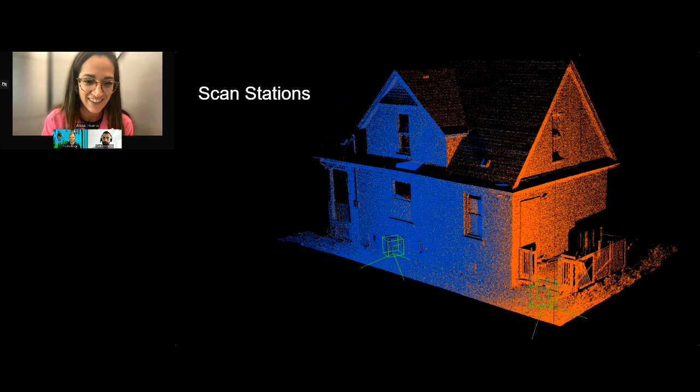This goes back to good planning as well, like Ted talked about in the photogrammetry section. Before you go on site, you really need to plan this in advance. We always say, what are you doing with the scan? So you have to know what you're doing with it, and you'll have to make sure you have a clear line of sight to everything you're trying to scan.

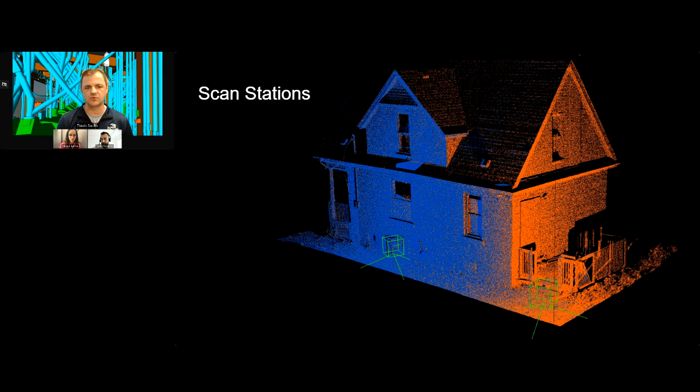Because you can only capture what you can see, you want to make sure you're able to see what you need to. Then with the registration, each setup position will have a mass of 3D points that form individual point clouds, and you'll want to put them together. There are different methods you can use for that.

Typically you'll want some sort of control network that you capture with a total station, or even just setting up targets. But also, these softwares now use lots of algorithms, and they'll use walls and fixed objects to calculate that registration throughout the whole scan. So instead of just using single targets where you might get 100 points, with cloud registration it'll use all those millions of points and try to match them to the other millions of points, so it's a much tighter registration.

With that example we just saw, that's two different scan locations. When you take a very thin slice, you can see how those registrations align to each other.

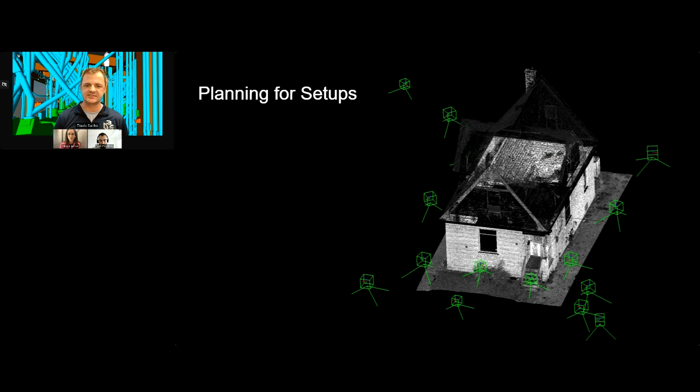Again, the first question we always ask is, what do you want from the scan? What are you trying to capture? That will determine the outcome, because sometimes you don't want to overscan, since then you get too much data, because we're capturing literally millions and millions of points a second.

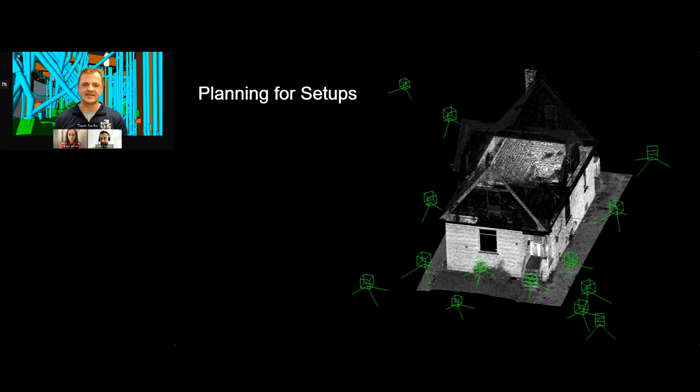So those data sets can get very heavy quickly. We want to make sure we do proper site planning, and make sure we capture what we need, a little bit more than what we need, but not too much more. You always want to make sure you capture enough. It's always better to need it and not have it, than to have it and not need it, because then you'd have to return to site.

These comparisons are all from terrestrial laser scans, so static scans. I'm seeing some comments about SLAM-based scanners, mobile scanners. Anytime the scanner is moving, there's more to account for, so the true reference comparison here is always going to be terrestrial laser scanning, static scanning.

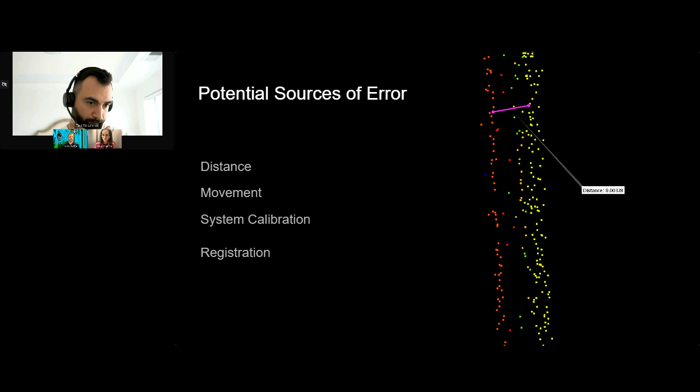Some sources of error you can get are distance, as I talked about with the phase shift scanners. As you move further away, you start getting more noise, range noise, and things like that. If your scanner moves during the scan, some of the higher end scanners like the Leica P series have dual axis compensation, so they can compensate for that. But the mid and lower range terrestrial scanners don't have that compensation, so you'll get errors in there.

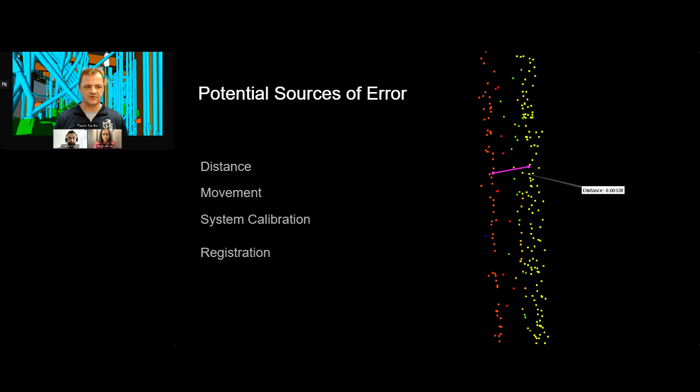If there's anything with your system calibrations that's wrong or not up to date, it gives you false returns. With some of the mobile scanners, that data you can actually manipulate. With the terrestrial scanners, you can't manipulate the data - it's one-to-one, it is what it is. Some of those mobile scanners, you can really run into some big errors pretty quickly if you don't have a really tight control network.

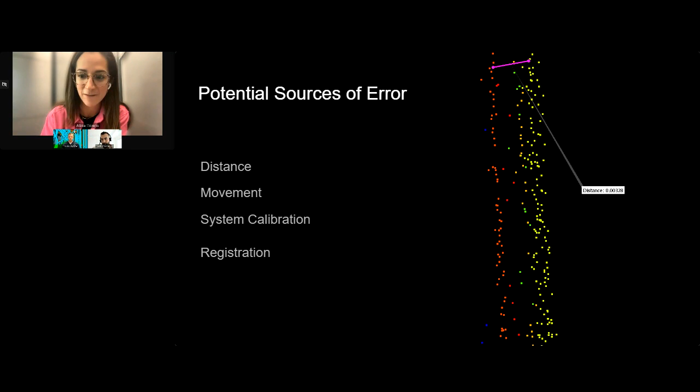So what you capture is what you get, basically, and there's very little room for improving or changing that data in post-processing. Yeah, exactly. So in those cases, you would get errors if you don't have a proper registration, and that's where you put the two together. That's one of the limitations for sure.

And then if you're doing a large complex site and you need to hold that accuracy, like a whole factory, it's much easier to capture that data with a terrestrial scanner. So it'd be good for that application.

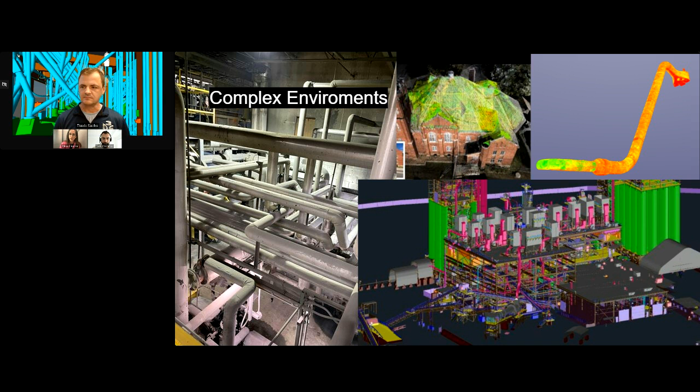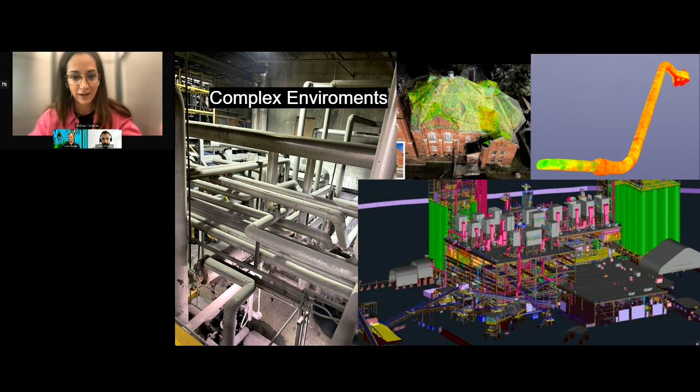Yeah, I think when I was at Bentley, there was a significant number of infrastructure owner operators that were looking into the hybrid approach, going from LiDAR laser scanning for very complex environments, and adding the photogrammetry layer on top of that to create a hybrid model that was ultimately the best possible digital twin they could work with. So yeah, this is a very good use case or example of that, I believe.

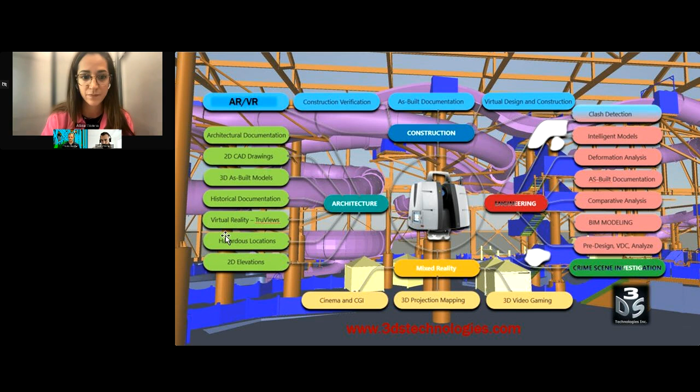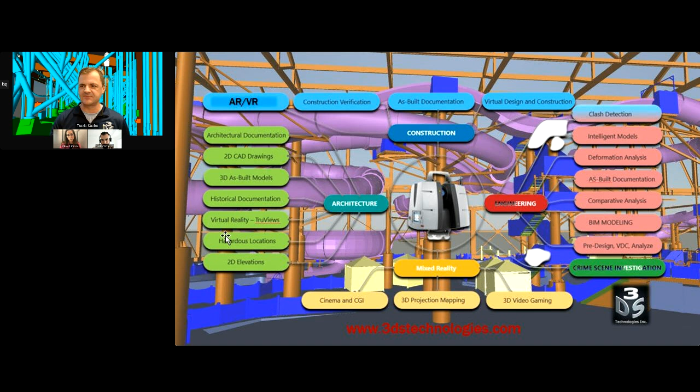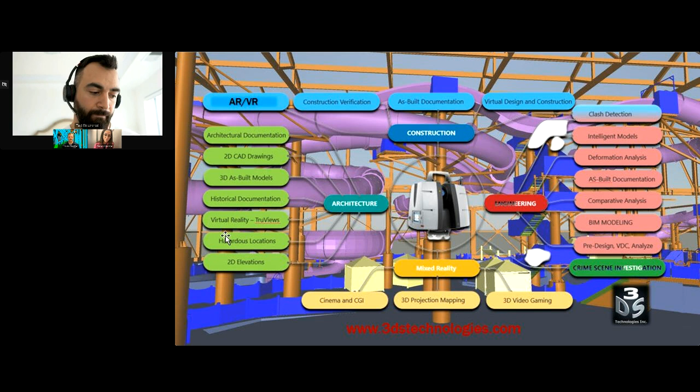Yeah, and as you can see, in terms of LiDAR, the applications are endless. You can use it for many different applications, and that list is growing because I think we're starting to see the benefits of certain applications and how much easier this makes it. Yeah, for sure.

Let's maybe touch on the cost here. Travis, what could you tell us about the cost of these type of projects? Yeah, so it ranges, right? You can get a low range terrestrial scanner in the tens of thousands of dollars, and then you can go all the way up to $250,000, and some of the mobile mappers are in the millions.

And the difference between those will be the range noise, angular accuracy, things like that, and the speed of the scanner, all kinds of things. And then with the scanner, you also have to take into consideration the annual calibration costs. And typically most scanners, you have to purchase a registration software. There are free registration softwares out there, but to get really good results, you'll want one of the proprietary softwares.

Yeah, and I think again, we go back to the project requirements and the customer needs, right? It depends on budget, that's a key one when we're talking about which technology we're going to be leveraging for specific projects. What's the budget, what are the final requirements in the deliverables, that will help you decide, do you really need laser scan? What are, and what's the budget?

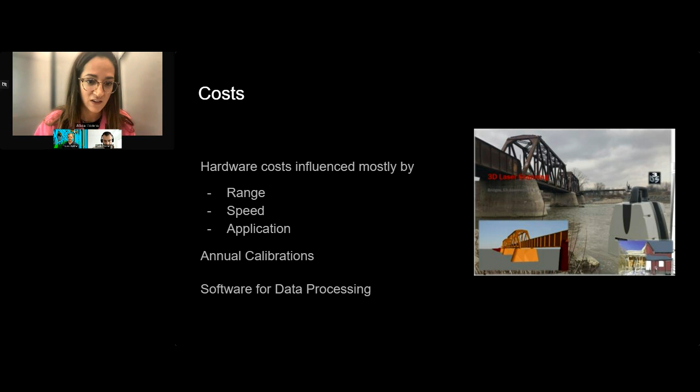So do you find that a lot? Well, yeah, and that's one of the things we help our customers with, because if you just need a floor plan, then you don't need a $120,000 P-series scanner, right? A Matterport might be fine. So it all depends on the application. We always ask, what are you trying to do? And we'll try and help our customers make the best decision. And in a lot of cases, photogrammetry is great. It's a great solution.

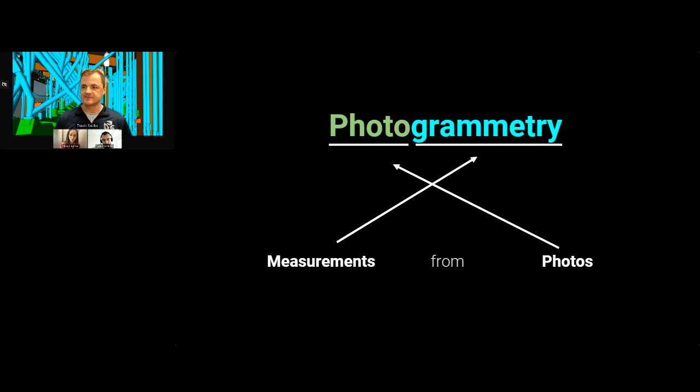Yeah, absolutely. Let's move on to photogrammetry, Ted. Let's start with the basics. Yeah, I think most of the audience probably has a fairly good understanding of photogrammetry just because it is so accessible and people are starting to really try it themselves. And that's really the best way to understand how it works.

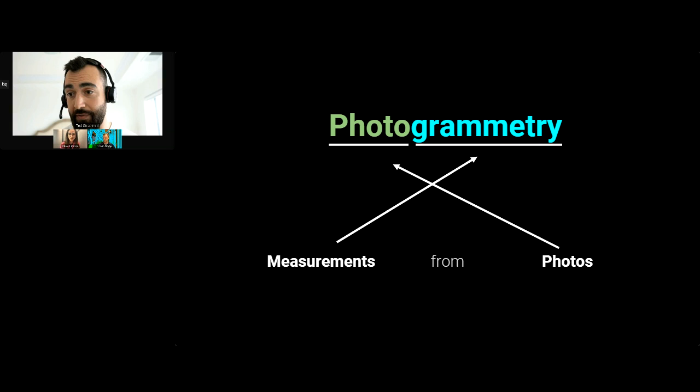But fundamentally, it's measurements from photos. So in order to make those measurements, we need photos, and those photos need to be overlapping and captured in a very consistent manner. Same distance from surface is very important. That kind of dictates the accuracy you can achieve. And if that's the same across the entire subject area, then you have a much higher chance of getting the accuracy you desire.

But any photo works. In this case, the data you're going to see, all of the imagery was collected with the Skydio S2 Plus, using the 3D scan software that is on the drone itself, which allows it to take over and do all of the data collection autonomously.

I just give it a section, a volume, and it just goes and collects. Both the laser scan and the photogrammetry were done on the same day for this asset.

So after you have those photos, the photogrammetry software goes and matches them. Essentially, the unknown is where was the camera when the photo was taken? Where was the drone, and how was the camera pointing when the photo was taken?

So that's done by creating tie points first. Those are sort of like fingerprints, like little signatures within each image, and then matching those tie points. You can see here how those matches correlate to each other. These are 3 images that are captured sequentially.

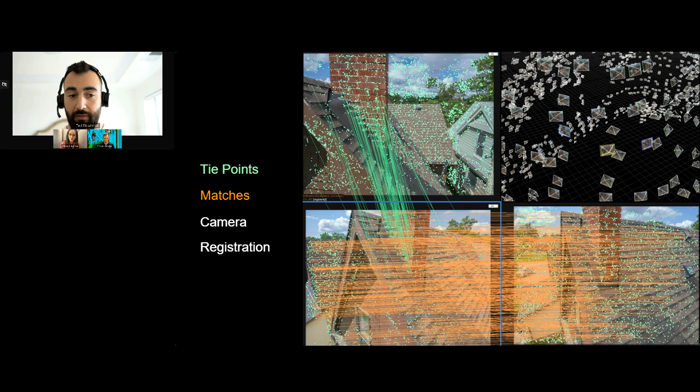After that's done, we can register those cameras. It's very similar to how those laser scan stations are registered together, except we're registering images. But how do we get 3D from 2D images?

Through that process, the densification of those points, and more triangulation, we can extract depth maps from these images. A depth map is still a 2D image file, but it has another dimension there that's usually shown as this grayscale color, and that is the distance away from that camera.

And similar to the laser scan, I guess planning your flights is essential, right? Weather conditions, overlap, these kinds of elements are going to have an impact on your final deliverables, and the quality of your final deliverables.

Exactly, and laser scanning is an instrument that is very finely calibrated, very accurate from the factory, and it doesn't fluctuate very much. But cameras fluctuate a lot, and there's many models of cameras, many lenses. All of those factors come into play. So it's really about controlling those unknowns as much as possible, so having something that takes some of that work or effort away from the user really helps.

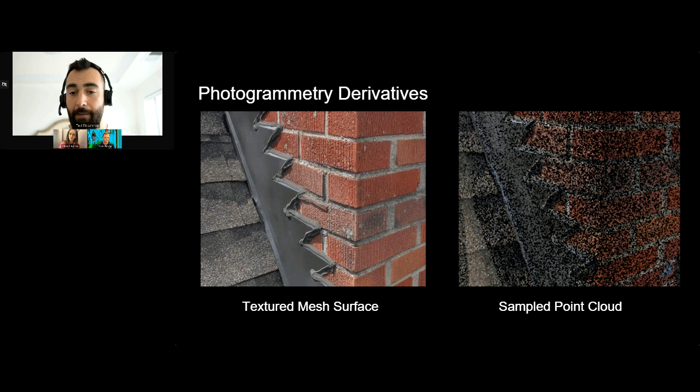And from there you get to what you see here. The two main derivatives we see with photogrammetry are textured meshes, which give you this photorealistic surface, and then from that surface you can extract or sample points. Some photogrammetry engines do this a little differently—they skip the depth map and just make more tie points.

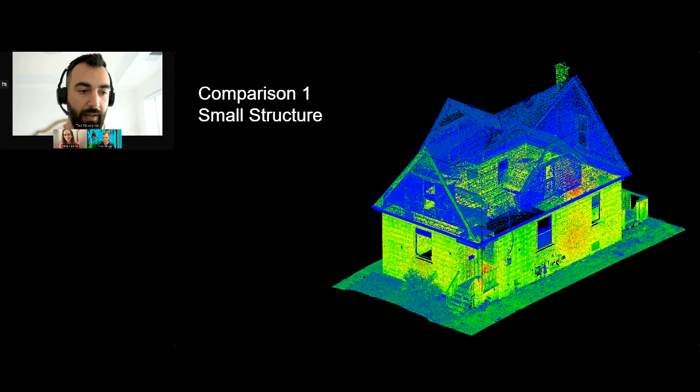In these examples that I'm going to show, I use Bentley Context Capture, or iTwin as it's called now. And iTwin does that route where it goes depth map, mesh, and then subsamples the points from that mesh.

So yeah, let's dive into the comparison. Here's the area that we scanned. You're seeing the laser scan, and you're seeing the point cloud from the photogrammetry overlaid on it after I've registered those two things together.

So which one is which? Yeah, so the laser scan is the one that's brightly colored. That's showing you the intensity of each return. Laser scanning can't show you color, but it can show you how reflective the surface is that pulse of light or phase of light bounced off from, and that kind of replicates color quite well.

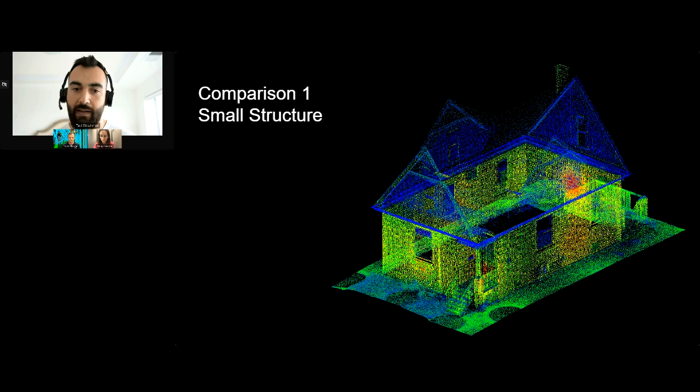So you can make out certain details. You can't really use it for inspection, like bridge inspections or structural inspections, but there is some detail there that allows you to conceptualize what you're looking at and see the difference in materials as well.

So for this specific—yep. No, sorry, I was going to say I expect that's already for certain projects an advantage of photogrammetry versus LiDAR.

You get, after the flight and the processing, already a representation of your physical asset, which you do as well with LiDAR, but you don't have that color in your final 3D model.

Yeah, with LiDAR you can add the photograph after, and then each point will have the RGB value. But it's an extra step after the data capture.

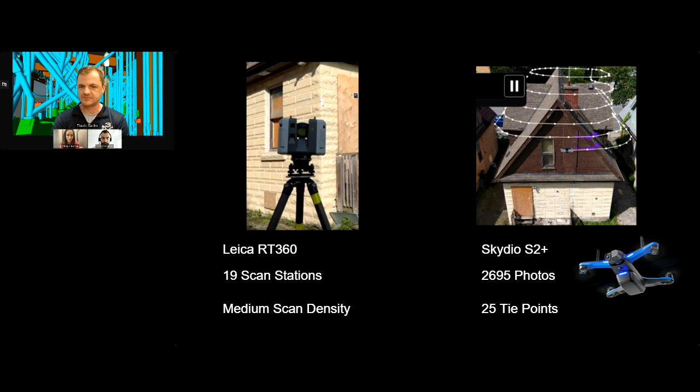Exactly. So the RTC that we used here has color cameras on it that it aligns for you, so you do get both. The main difference though is that camera on the laser scanner isn't really meant for inspection. It's fairly low resolution, and it's really just there to help you colorize the point cloud, give it a more natural look, and also help with registration, which is what you'll notice.

There's some targets around this building that I set up, and using that camera built into the scanner was how these two things were merged in the derivative that I was aiming for here.

Do you have a sense of the time spent on these two methods, with LiDAR versus the Skydio? How long did each take?

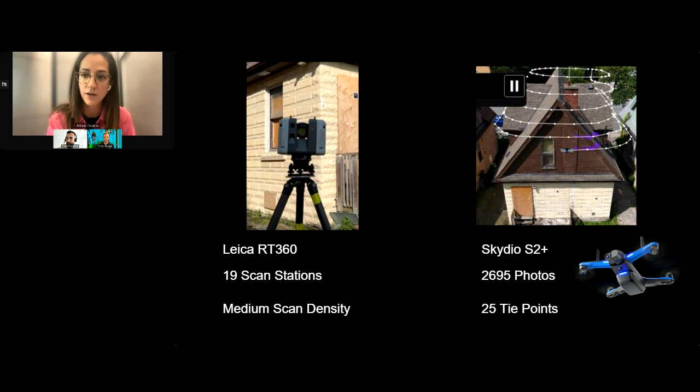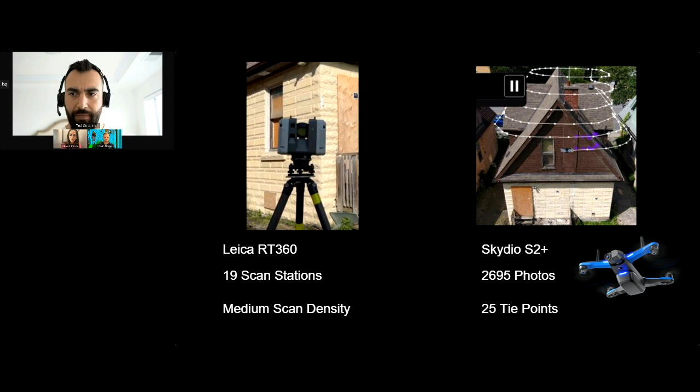The laser scanning moved along quite quickly, less than an hour. Laser scanning for small sites like this moves very fast. The photogrammetry was about 2 hours, so not significantly more. But again, there isn't much area here, it's just a lot of dense data collected in one spot.

So let's take a look at how we're going to compare these. Basically, we're going to use the terrestrial laser scan point cloud as the reference, the ground truth. We'll assume that's the most accurate representation of that asset we can get.

The first version is unconstrained, meaning no controls. Really the only thing that was there is what the software was able to find in the images and match, along with those stickers that I placed around the surface, which help align everything. This asset didn't really need those stickers, but I put them in because it helps bring the laser scan and photogrammetry data together in post-processing.

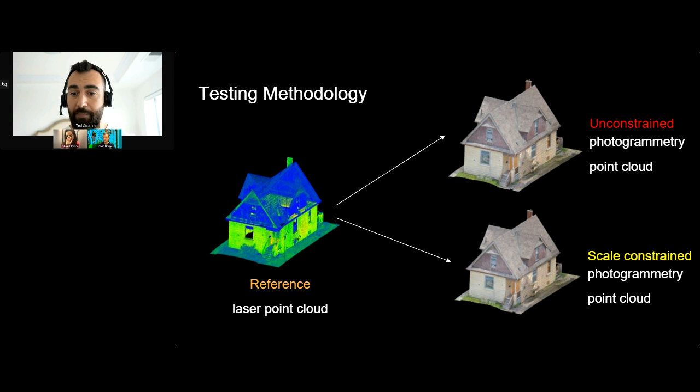The other version of the point cloud we'll compare to the laser scan is a scale-constrained point cloud. Same data, except now we're giving it one reference of scale, and you'll see why that's important and what difference it makes.

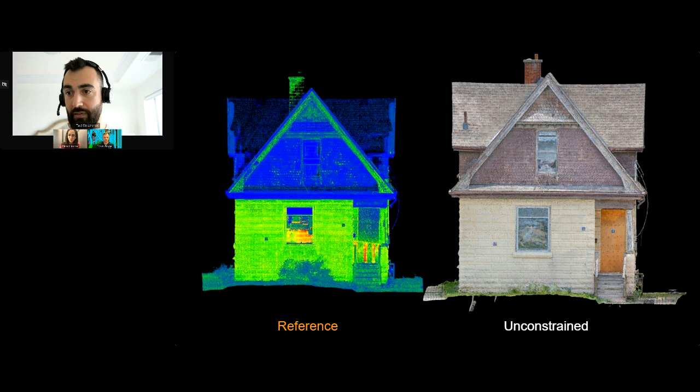Here's the basically raw, unscaled photogrammetry point cloud beside the LiDAR point cloud. You can see scale has obvious errors, right? The house appears to be much bigger than what the terrestrial laser scan dimensions show us here.

Let me clarify, since I've seen a couple of comments. The one on the right is the one coming from photogrammetry, and that's unconstrained right now, but we'll see another example where we've introduced a scale constraint. The one on the left is the one captured with laser scan, and you could have added color to that one as well.

There's an option to have it colored. And then there's also a way you could basically merge these two and create what Bentley Systems calls a hybrid model, using the laser scan data and the photogrammetry together to get the best possible 3D model. I have a post on LinkedIn that shows the final derivative of that.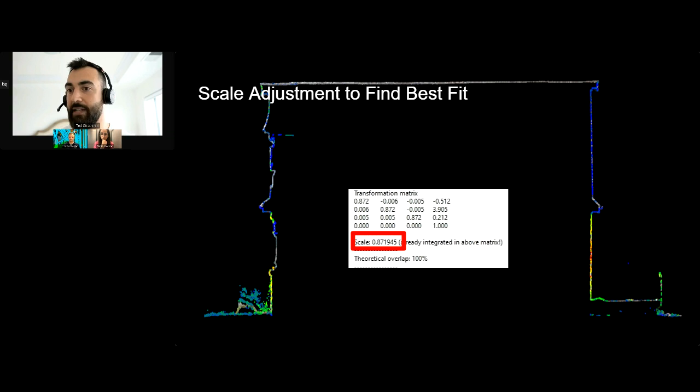To look at the factor of that scaling in this example, I did some very basic point-to-point matching, and it turns out the scale factor of photogrammetry to match the LiDAR point cloud is about 0.87. So you can think of it as the photogrammetry being 13% scaled up from what it should have been.

Which isn't bad for certain use cases. That would be good enough for what use cases, Ted? Exactly, for inspection that could be fine depending on what you're looking for. If you're looking for general inspection information, like where the cracks are, where the damage is, an estimate of how much area is damaged, 13% isn't going to make or break that inspection in a lot of cases.

In other cases, it is more critical. So doing something like this is probably what you should attempt first, which is giving the photogrammetry software a reference of what two distances within the scan are.

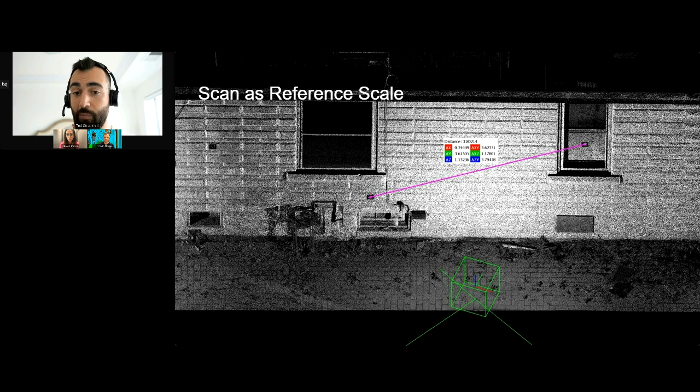So to do that in this test, I got that reference from the laser scan. I had two targets and measured the distance between them. You can see here it's roughly 3.8 meters. I take this measurement, find those exact two spots in the photos, and tell it this is 3.8 meters. So from here on, use this for the rest of the reconstruction. That should bring everything back down to scale where we expect it to be.

And this is available in most photogrammetry softwares. All of them. Scaling is such a basic thing. Again, it's just a rigid global scale. It's not like we're taking one side of the house and making it slightly larger than the rest. It's just one rigid adjustment.

To do that, it helps to have a point of reference, a target, something to pick and say this is the center of the first point, this is the center of the second point. In this case, I used AprilTags, which are very useful for many other things. But you can see here that with the photos, you have a lot more precision in picking that point that's right in the middle, because from just a point cloud, you're left with the points that you see. So the intensity and color added to laser scanning helps find where that target is.

But there's some measurement error there. Where are you going to click? Where exactly is the center? You can see in the photo it's very, very high resolution, so you can see that center clearly and click within a few pixels of it. It definitely provides more context as well.

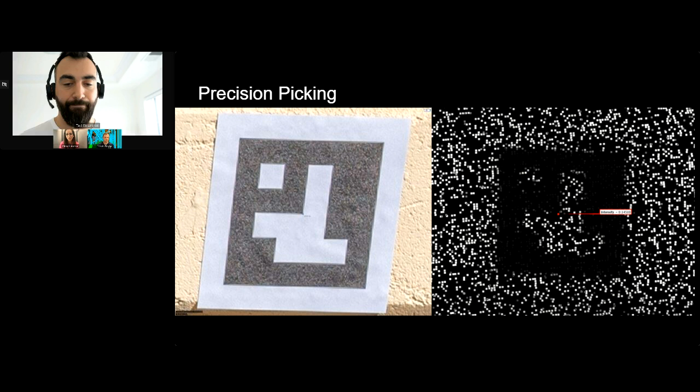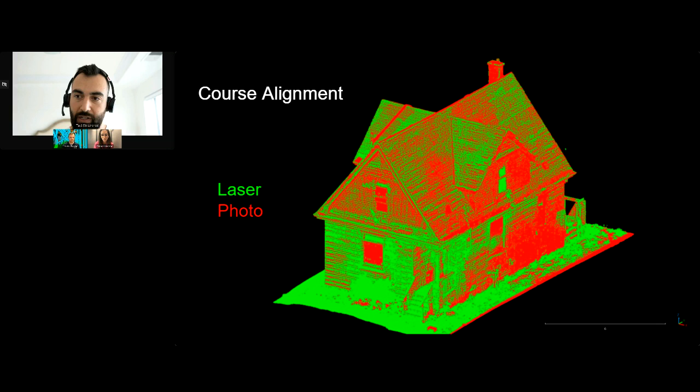So now taking those two scaled versions, the laser as the reference and the photogrammetry using that scale constraint, and doing a quick coarse alignment on those two point clouds, you can kind of see how they match. This is just a very coarse alignment. The laser is green, and the photogrammetry point cloud is red. So in some places they're overlapping, some places one is under the other, etc. We can do a finer alignment next, and then compare exactly how these point clouds fit within each other.

To do that fine alignment, this is stuff you can do yourself, and if you have questions on how I did this, feel free to reach out to me directly. I'm more than happy to show you how. But in a nutshell, we bring in the photogrammetry point cloud, bring in the laser point cloud, use that as a reference, and then disable scale adjustment. So in this alignment process, it's not allowed to adjust the scale of the photogrammetry point cloud, because I'm saying I've already handled that scaling in the photogrammetry software. So it's a very apples to apples comparison, straight out of the post-processing.

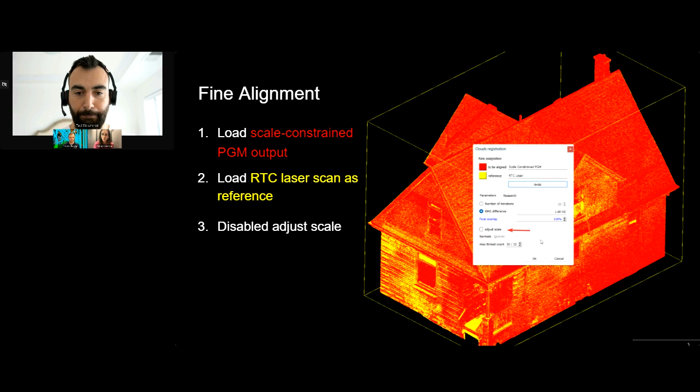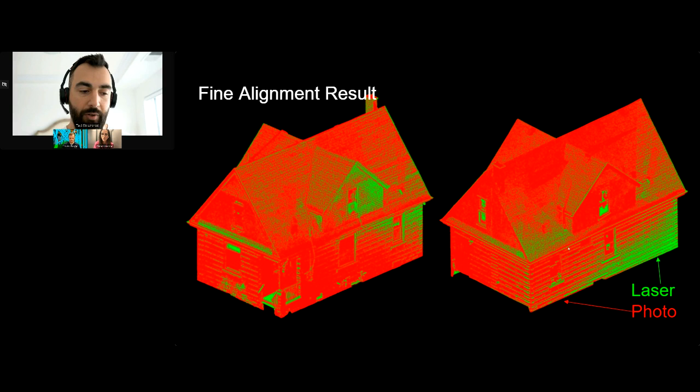Here's the result of what it looks like after that final fine alignment is done. The point clouds are transformed, moved a little bit to fit as best as possible. You can see again that area where one is slightly out in front of the other. There's a little bit of deviation, some distance between these two points in some areas. Some areas they overlap perfectly, and other areas the photogrammetry point cloud is in front of it.

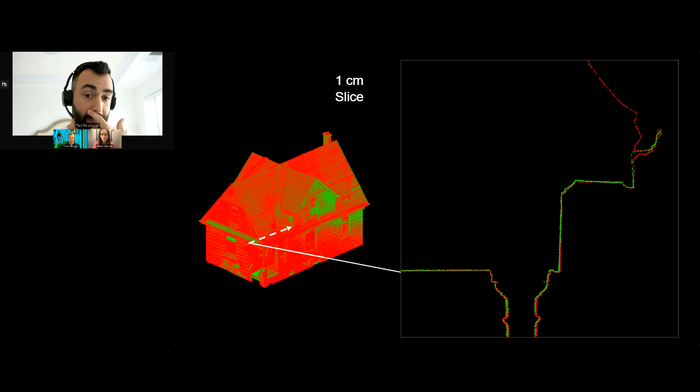Let's take a finer look at this. I'm taking a cross section, a 1 centimeter wide profile, running down the side of the house at the corner, and you can see the red is photogrammetry, the green is laser. These are very close, but there are deviations. There are areas where the photogrammetry gets it wrong, and most of the time that's because the material we were modeling might have been metallic, might have had some reflection. Reflections, anything with that type of surface, is very challenging for photogrammetry because it just can't match points between multiple images.

But on the other hand, the laser scan also has some areas where it just can't see. It's all line of sight. So having the two together allows you to completely cover all the surfaces and all the dimensions. And all of these measurements are metric, by the way, so we're looking at millimeter differences between the two.

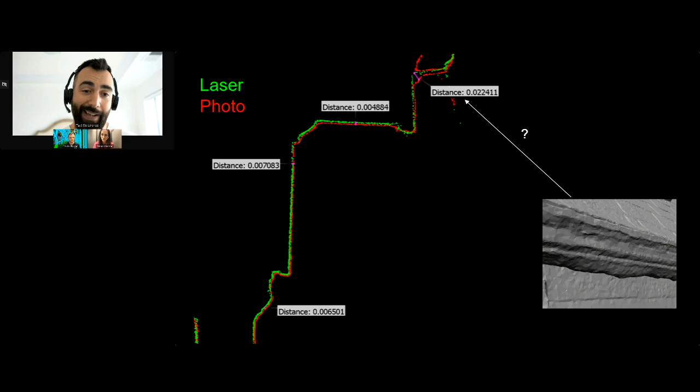And the worst case is at the top there, 2 centimeters. And that's because of that smoothing that photogrammetry can create. You can see what that smoothing looks like in the model. It's this sort of melted eave trough, right? That's not really what it looks like. The LiDAR has no problem with that, but the photogrammetry will always have problems with that.

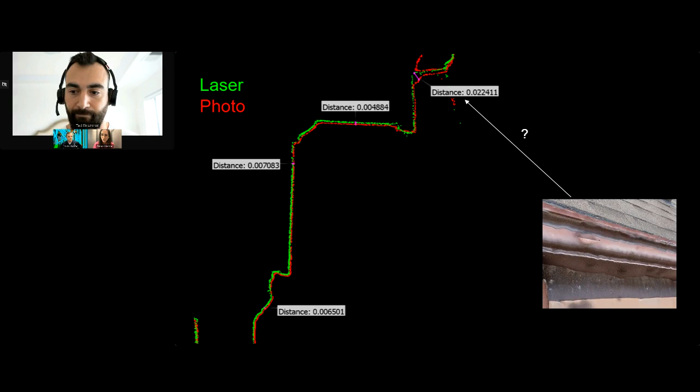Can you recall what's the GSD for the photogrammetry model? I don't recall, I think it was in the millimeter range. As you saw, this area was pretty tight, so we had to fly really close to it. So GSD, the spatial resolution of the images, was quite high due to the fact that we were so close to it.

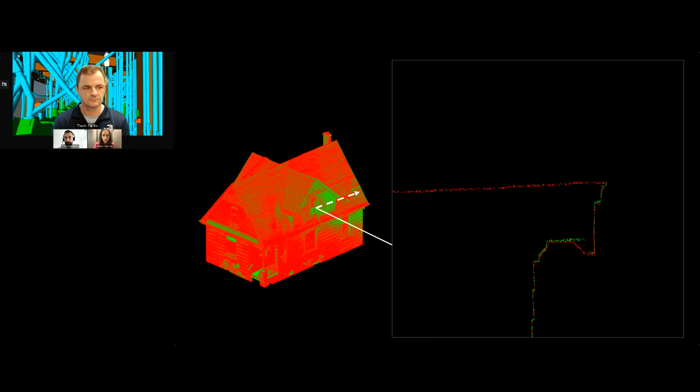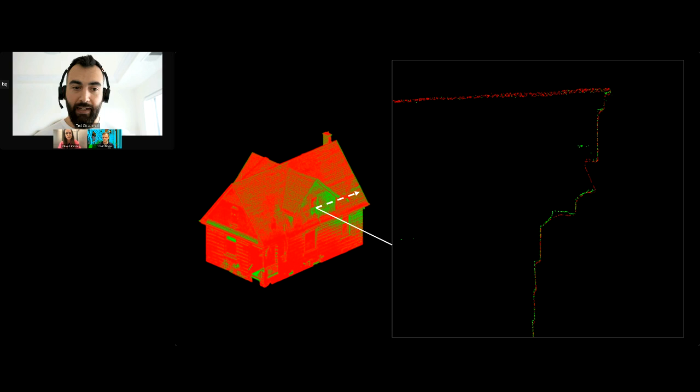And I think you mentioned already, but you use Context Capture for this specific project, but we use Skydio. Skydio data is compatible with most photogrammetry platforms. But I think you're quite familiar with both Context Capture and Reality Capture. What are your go-to tools when it comes to photogrammetry? Well, if I want to take both and create that hybrid scan, I prefer Reality Capture because it supports structured point clouds in a way that allows me to very fine tune that alignment between the photos and the laser scan. But generally, it's what you're comfortable with and what you're doing.

So with photogrammetry you have lots of options. With laser scanning you use the software that scanner supports essentially. At the end of the day, again, it's always what are you after, what's the deliverable. Context Capture is what I'm showing for the photogrammetry point cloud here, and it has not been merged with LiDAR, or else it would look perfect - they would be a 1-to-1 match here. But Reality Capture is great to combine them as well, and there's some other software there too.

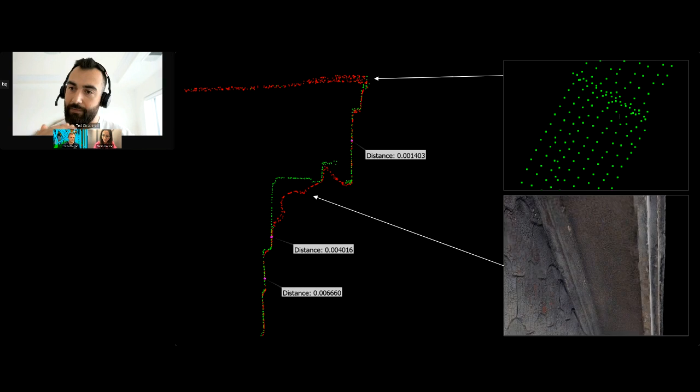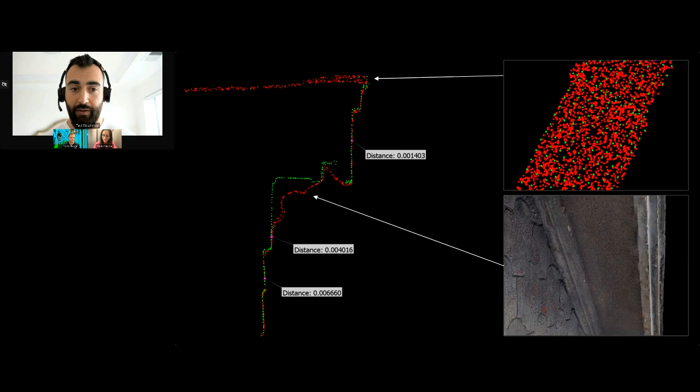So here's another example. Again, those distances very close, sub-centimeter - 6 millimeters at the bottom, 4 millimeters. And then you can see another one of those cases where the red points, the photogrammetry points, are kind of melted. It's smoothed across, and it's not really showing the true geometry of that portion of the house. You can also see an area where the laser scan just didn't see anything - it was in a shadow, so there's no points from the laser scanner there, and that's pretty evident at the top, that's the roof. So the roof was on a pretty steep slope, and due to that high angle of attack for the laser, we're going to get less points that come back and are registered on the scanner itself, but still enough points in this case to make a surface out of it.

Now, just to show that I'm not cherry picking locations, let's take a look at a global comparison of the distance between these two point clouds. A wonderful software to do this in is called CloudCompare. It's completely open source, amazing software made specifically for this purpose. It's going to compare the photogrammetry point cloud to the reference laser scan point cloud, and it's not just going to compare to the nearest neighbor, because that distance may be incorrect, but it is going to use some local modeling to essentially create a surface from that laser scan and measure the absolute distance between the compared point and the laser scan surface.

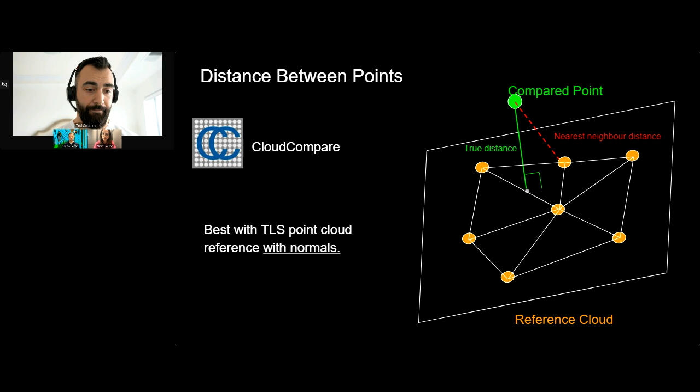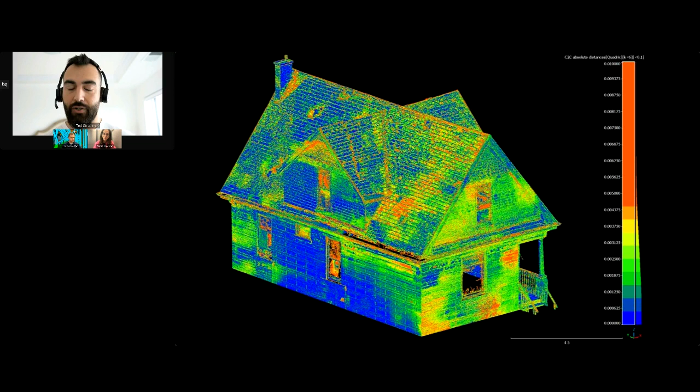So this is what it looks like in this color scale. You're seeing the photogrammetry point cloud, but the colors that each point has inherited show us the distance of that point to the laser scan. So anything in blue is basically zero - there's no delta between the photogrammetry point cloud and the laser point cloud, they're right on top of each other. Anything that's in red is 5 millimeters or above. There obviously is a lot of outliers here, things like glass and those surfaces that I showed you earlier - I've taken those out of account. I'm looking at anything within a centimeter of each other and how that relates globally to this scan. So you can see, very, very close.

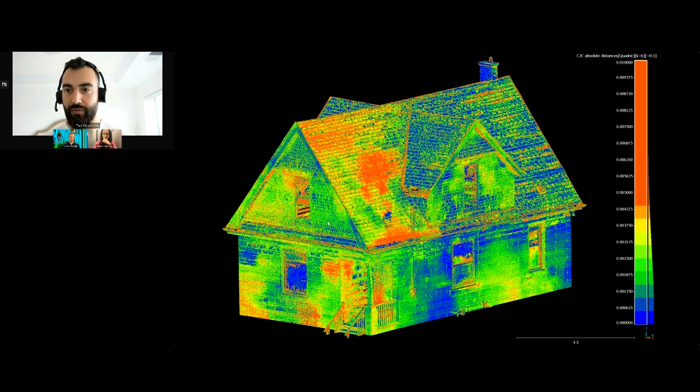There are some areas where we're seeing that centimeter distance between the two, and those areas are where you'd expect them to be. They're on that roof. Remember, there's less laser points to compare to there, so it's not directly indicative of systematic error or measurement error here, but the distribution is very nice.

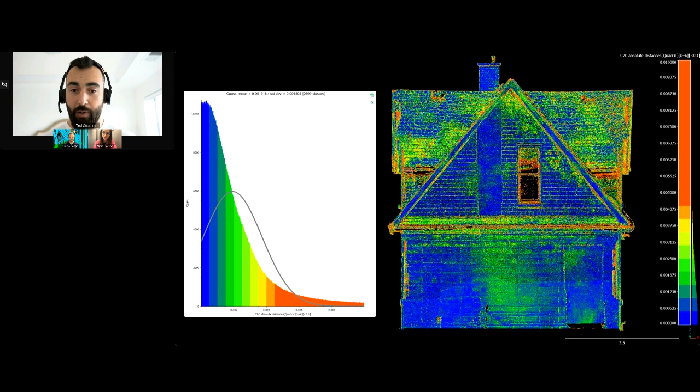It really does show that if this is done with even just one scale constraint and that's it, you can get really, really close. Is it perfect? Absolutely not. There's so many variables in photogrammetry and photos to get this right. But is it good enough for a lot of use cases? I'd say probably.

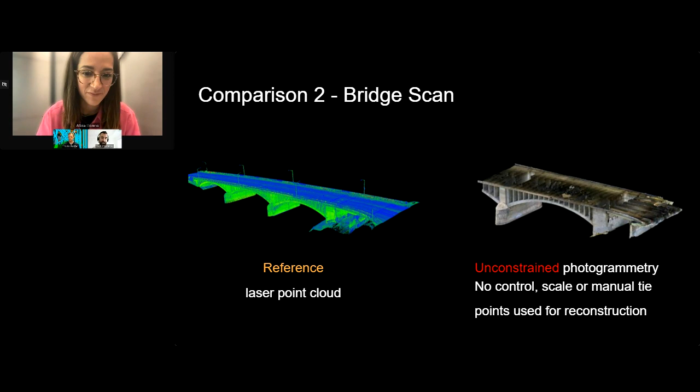And here's another example. Do you see consistency across different, like I know that this example was a small house, do you see consistency across different use cases? And I guess it's a good segue for the next comparison with the bridge scan. Yeah, that's the perfectly timed question, because consistency is key, right, when we're talking about measurements.

So with this example, you'll see that the results differ a little bit. To introduce these two data sets, the reference scan, again this massive scan of this bridge - in fact, Travis told me that this bridge wasn't even what they were there to scan. It just happened to be nearby, and there was enough data that I could use it for this. So that's an example of sometimes you get more data than what you need. We were focused on the area around the bridge, but we captured the bridge, and it just so happened that it worked out well for comparison.

Yeah, I think I saw you post this bridge on LinkedIn. I was like, oh my God, I have a scan of that bridge too. Can I have that point cloud? Because I really wanted to see this.

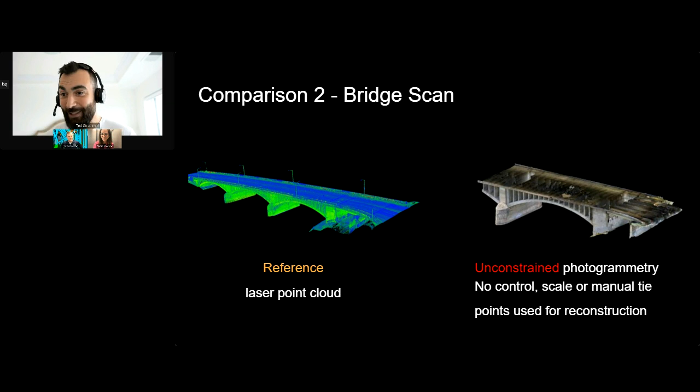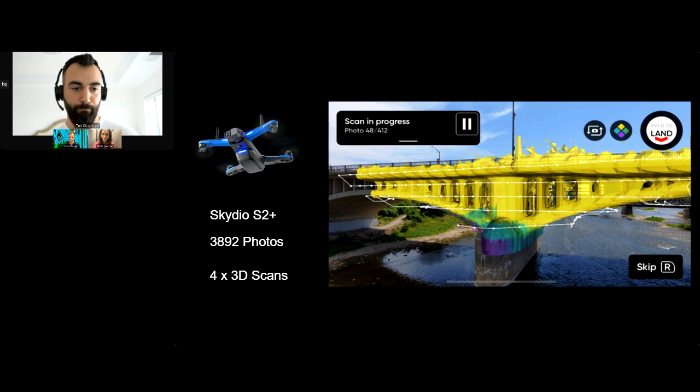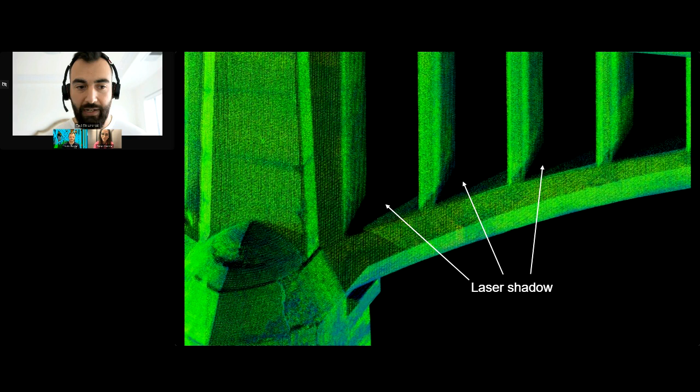To compare it, I'm taking a small section off the side elevation here of the bridge. There's some things that wouldn't be a good one-to-one representation of the two point clouds. For example, in the next slide you'll see, and you can see it here too, there's some shadows in the laser scan - that's line of sight. Travis had the scanner on the ground and the bridge is up there, it just can't see across there. If you really needed that, you would plan ahead and position the scanner in the appropriate location, but sometimes that might not be possible.

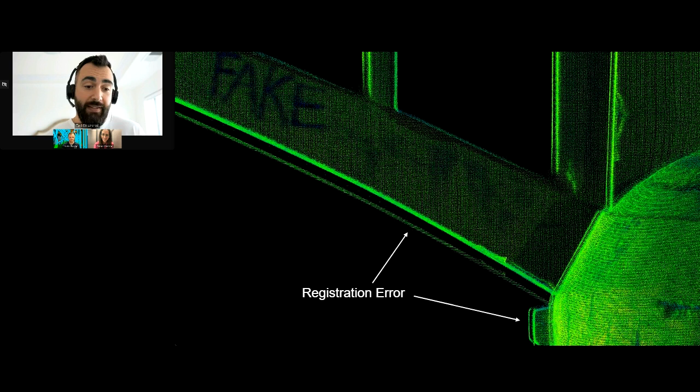And also there was a little bit of registration error here. I think because this wasn't really the intended target of the scan, this may have been overlooked. I don't think Travis made a mistake in his post-processing - I know he knows what he does very well. But this is, I think, a pretty interesting example that shows this isn't just put the scanner there, hit scan, and you're done. There is fine tuning, there is some quality control that happens after the fact to get it just right.

And photogrammetry isn't perfect either. Even though the drone was able to see areas where the laser scanner may not have been able to see, we never put the drone through the bridge to capture these images and create the model. We're very interested in the exterior for this quick scan, and this quick scan was about 3 hours, so it was at the end of the day. We had already done most of the inspection, and it was just sort of a test for us. So you can see some of the deformities in that interior section.

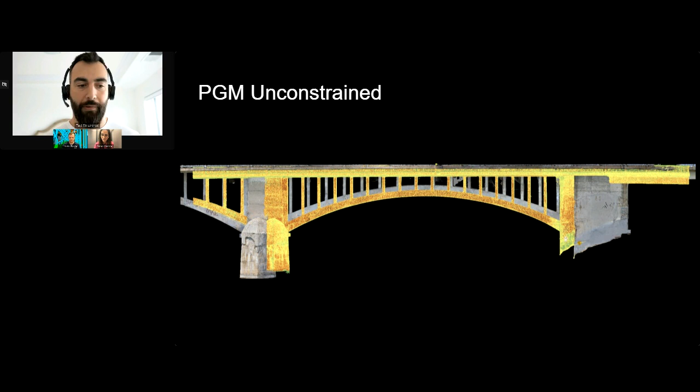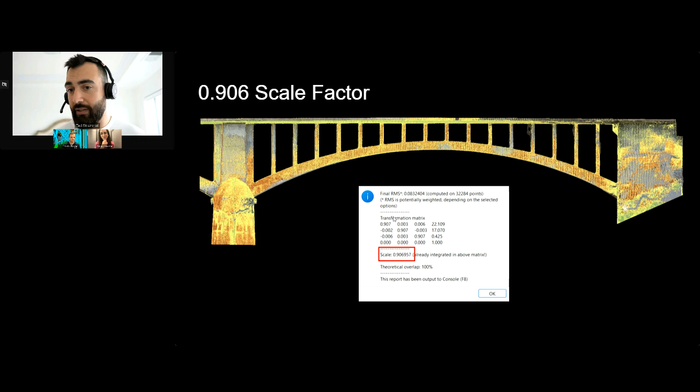Applying that same alignment to see how different the scale is, how far off we are, we're about 10%. So the scale factor is 0.9, meaning the photogrammetry point cloud needs to be shrunk by about 10% to get a best fit with the laser scan. A very rough best fit.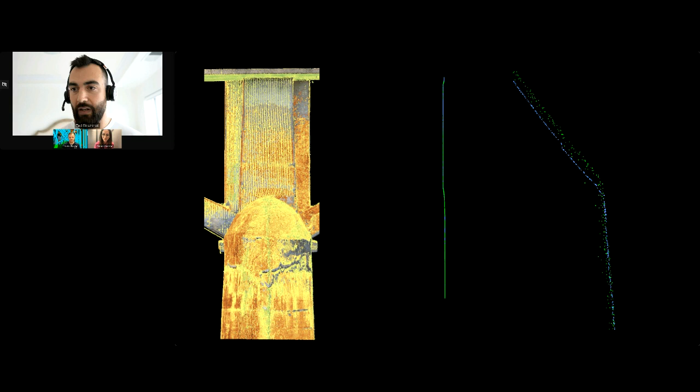Let's look at some sections. I picked this pier here. You can see certain areas it's right on the money, other areas there's a little bit of deviation. There's some registration error here to account for too, so not all of the points are valid, but it shows that the overall shape and relative accuracy of the scan is pretty close for photogrammetry. It gets to what you'd be very comfortable using in inspections or many use cases or visualizations.

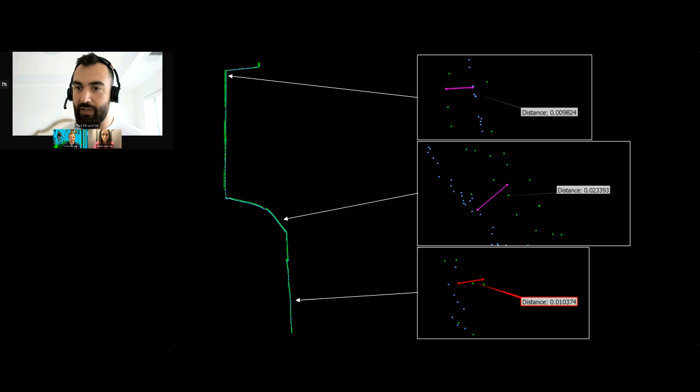Perfect for that. When we take a deeper look at the distances between those 2 points in that section, you'll see that now we're dealing with a much larger asset, much more distance to cover between the two. No controls at all, GPS with environmental issues that happen with the photos. So you can see the distances are now 1 to 2 centimeters. There's a bit more distance between the 2 point clouds, but still pretty damn close.

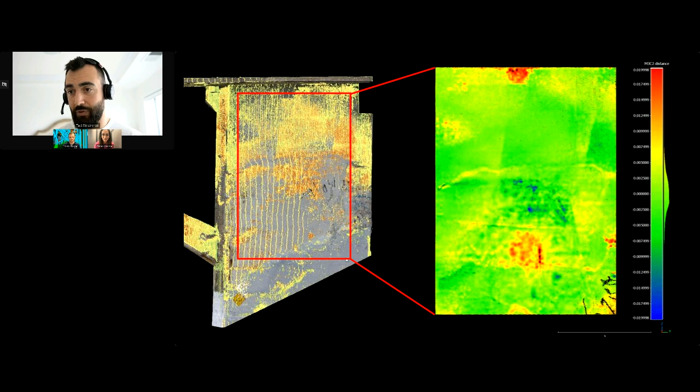For a more forensic analysis, I chose one of the really flat elevations near the abutment of the bridge. Here I'm showing the distance between points again with the laser scan as the reference. In that area on the right, you'll see some green, red and blue. Red means the photogrammetry points were slightly in front, blue means they were behind the laser scan - these are signed distances on this cloud-to-cloud comparison. Overall it fits quite well, but there are some areas where photogrammetry may have its own registration errors based on where those cameras were when they were taken, so there's a little bit of deviation there.

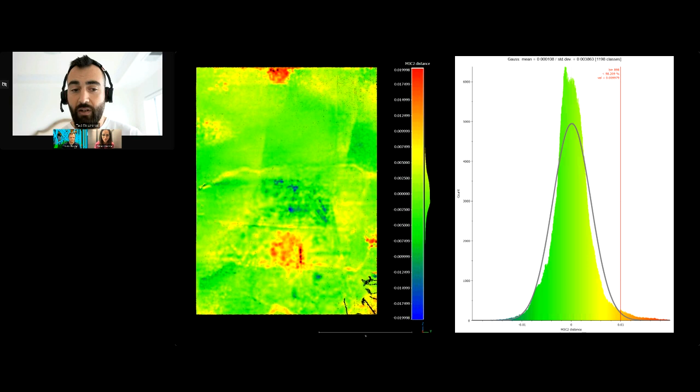Looking at the distribution of those distances across this area, the distribution is quite tight. We have a mean of... I can't even tell, looks like just under a millimeter - very, very close for the most part. But at the 1 centimeter mark, we're in the 98th percentile of those points. So again, very close. It really depends on what you're using it for, but if you just need a model, you can pretty much get away with doing it this way quickly and having that visual information as well.

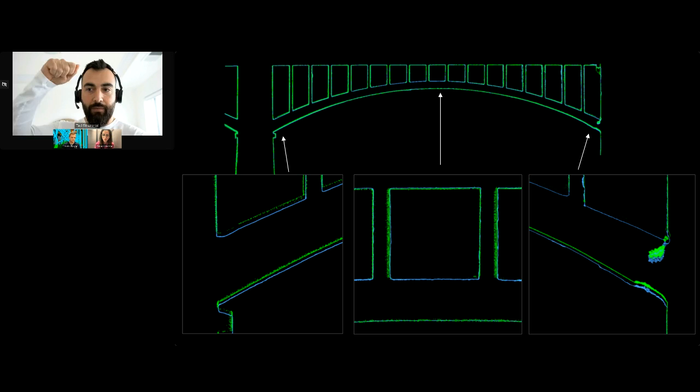Taking a look at a section as well, the whole profile of the elevation, it becomes fairly obvious that the photogrammetry point cloud is stretched vertically. That's not uncommon to see - the z-axis is always more difficult to get right. In the center of the bridge, the 2 point clouds are well aligned, but on the sides, the photogrammetry point cloud has less alignment, specifically less alignment in the vertical.

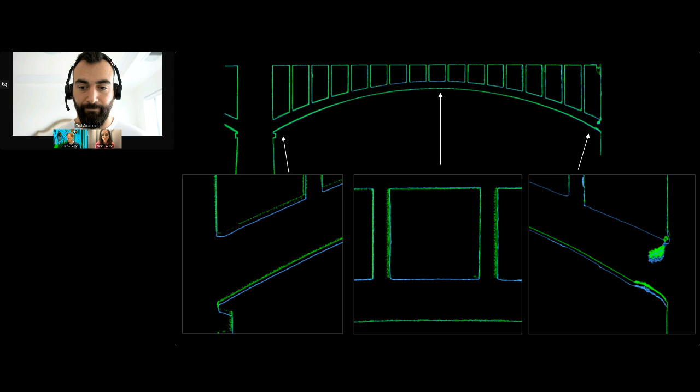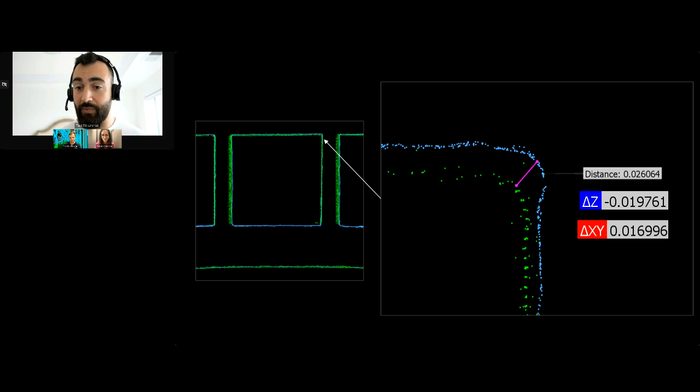Again, just looking at some distances between the 2 points, we're seeing changes up to a centimeter, up to 10 centimeters in some cases. In the middle here, where that alignment was best and the scale issue is less obvious, you can see that the distance between the 2 point clouds is in the 2 centimeter range as well.

Cool, so that was a lot of information. Yeah, and if anyone has more specific questions on how we do this and how to do it yourself, maybe with your own data sets, reach out to me - I'll show you exactly the steps involved in creating these comparisons and these graphics.

Let's go over some conclusions, Ted and Travis. Just to wrap up before we go over conclusions - I think you both touched on a lot of the weaknesses and strengths of both technologies. What do you think are the best use cases for LiDAR and photogrammetry? I'll start with you Travis, then go to you Ted for photogrammetry, and then maybe think about what are the key benefits of a hybrid approach.

Sure. I think when it comes to LiDAR, especially terrestrial scanning, it's the one you'd want to rely on if you want to be certain about accuracy - it holds that accuracy better. I've seen some comments about mobile scanners, that's a whole different comparison, and I think in some cases photogrammetry beats the mobile scanners. So in terms of terrestrial scanning, if you're doing any reverse engineering, if you need to be certain about your measurements, I would stick with terrestrial scanning.

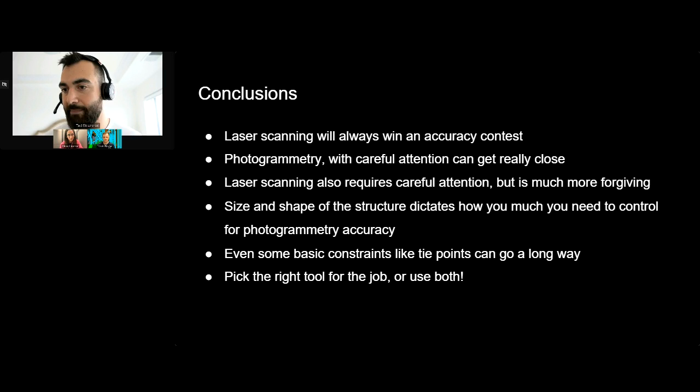Well, I think there's two options you could take. I don't think terrestrial laser scanning is well suited for that, just because coastlines sound like a long area, a lot of distance to cover, and setting up these stations would take some time. Aerial laser scanning, a lot of LiDAR payloads and drones out there are perfectly suited for that, that's the way to go. And maybe even handheld if you want to walk that coastline, depending on what the access is like. Both aerial and mobile laser scanning won't give you the millimeter accuracy that you're getting from terrestrial laser scans. But again, I'm thinking you probably don't need millimeter accuracy on a coastline survey like that.